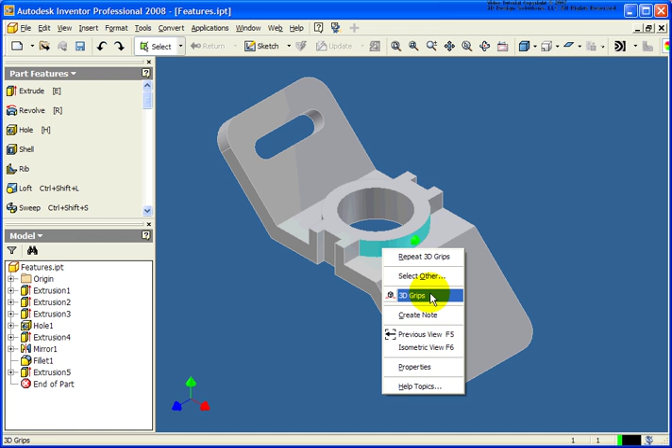In this lesson, we will be taking a look at two different techniques for editing a feature. The first will be 3D grips, and the second is going to be how to move a feature. So with 3D grips, just like in AutoCAD, I'm going to move my cursor over a face of a feature that I want to edit, and then going to right-click and select 3D grips from the menu.

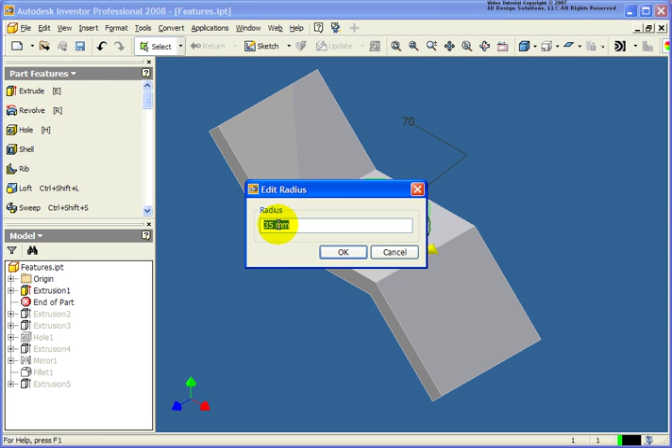Now from the menu, you'll see the feature will get simplified with circles, in this case, going around on each of the quadrants, and at the top. As I move my cursor over one of those circles, it'll appear with an arrow. Simply right-click, and you're going to get some different options. So in this case, I could edit the radius. So I could say that I want that to go down to 33, and it's now 33. You'll see that the dimension, in this case, the diameter is 66.

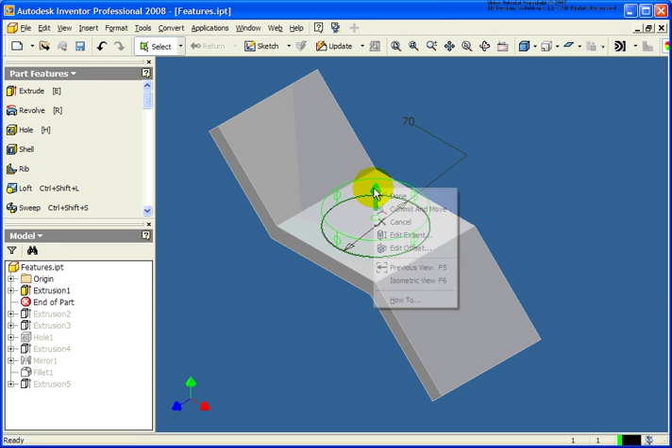You can also, again, right-click and edit the offset. So in this case, let's say I want to make it 2 millimeters bigger. And of course, that was with the radius, so it's now up to 70 millimeters in diameter. So we can do the exact same thing for any one of these grip points. So again, I can come back here now with the extrusion and say Edit Extents. So it's at 13. Change that back to 15, and I'm going to right-click Done.

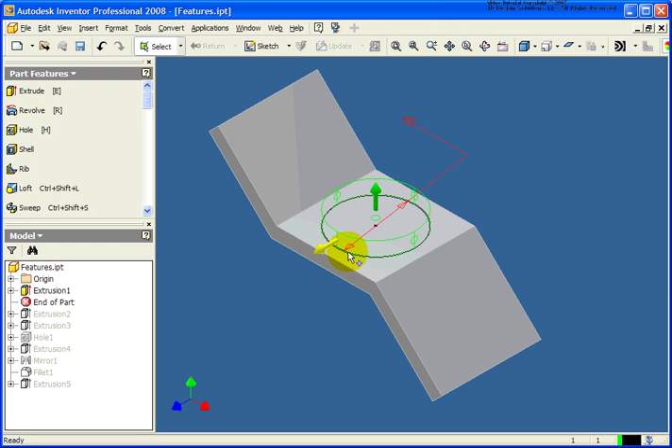And let's find that feature here in the browser. It's Extrusion 2. So Edit Feature. It's at 15 millimeters, and let's just check that one more time. I'm just going to move my cursor back over, 3D Grips, right-click. In this case, let's edit the offset. And let's make it a little bit smaller, so I'm going to do -2 and right-click Done. And again, if I double-click on Extrusion 2, you'll notice that it is down to 13 millimeters. So any edit that's done with the 3D grip is physically editing the feature. It's just another technique for doing that.

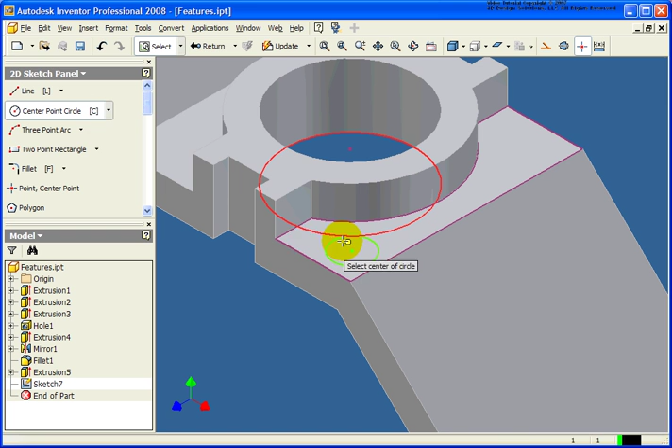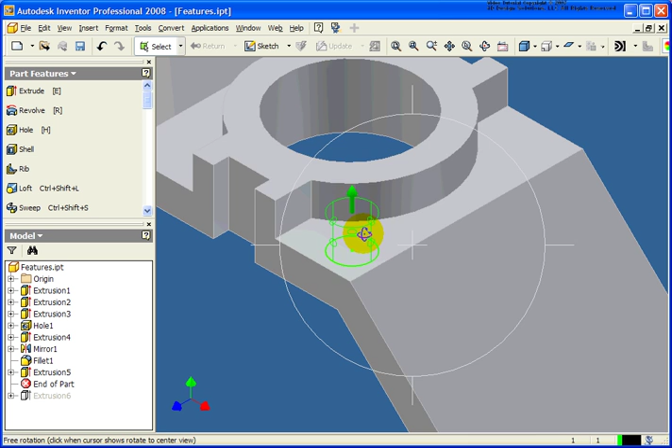I'm going to zoom up tight. I'm going to create one more feature here. And let's just create a small circle. And I'm going to extrude that circle up, let's say 5 millimeters. And what I'm going to do is I'm going to edit that one more time utilizing 3D grips. So what I'm showing here is I can go back and select the extrusion value, but instead of inputting a specific number, I'm going to select that top face, and you'll notice when I did that, it extruded it back up to that face. So now I can click on Done, and if I double click on Extrusion 6, you'll notice that it's 13 millimeters.

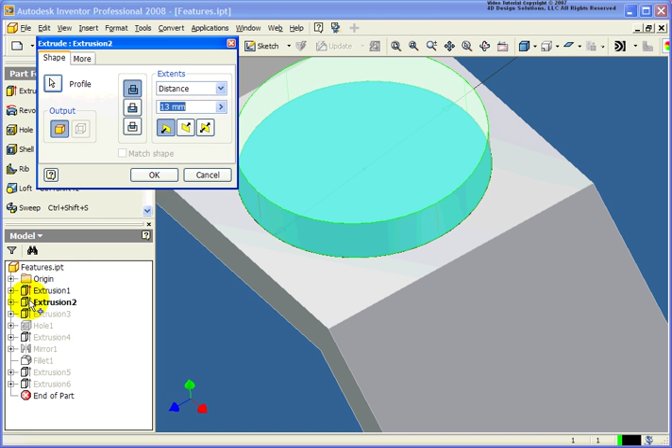Now that's not locked in, so if by chance I happen to go back and edit Extrusion 2 and say take that to 16 millimeters, you can see Extrusion 6, our circle that we extruded, is not being maintained. So there's other techniques if we want to have that relationship being maintained; using the to or from-to option for the extrusion method would probably be the best way to do that.

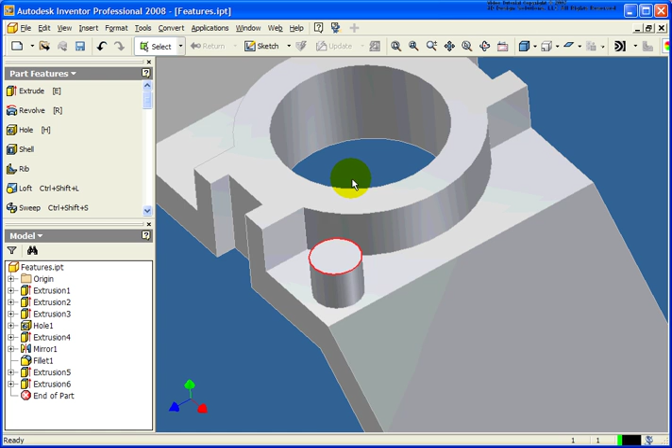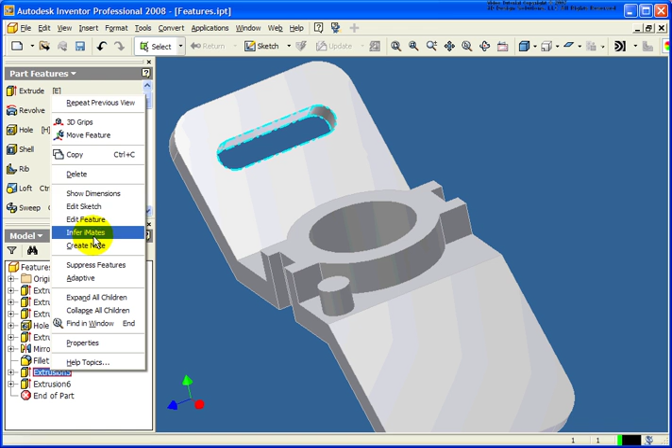The other method here, besides the 3D grips, is Move Feature. So I'm just going to rotate the model around. And now that the model is rotated, I'm going to find the feature in the browser, going to right-click, and right underneath 3D grips we have Move Feature. And if I spin the model around a little bit cleaner here, I have some grip points here. Again, I can right-click on them. I can figure out how I want to move this.

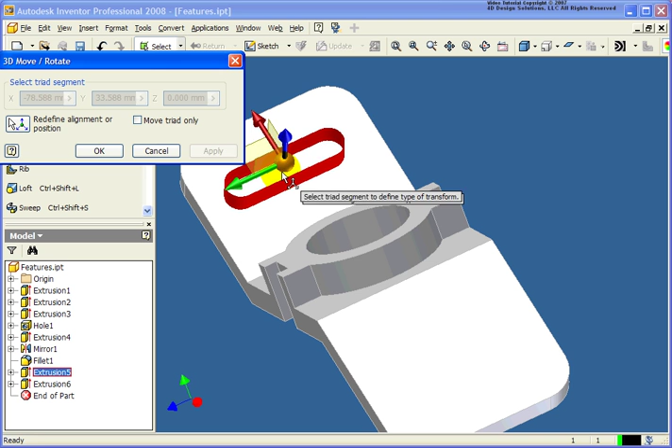In this case, I'm going to use the Triad Move. So I could select the axes that I want to move that around. So let's move it down 3 millimeters, or in this case, -3 millimeters. We'll move it back into the part. And if there were any constraints that were holding that down, those are going to be maintained.